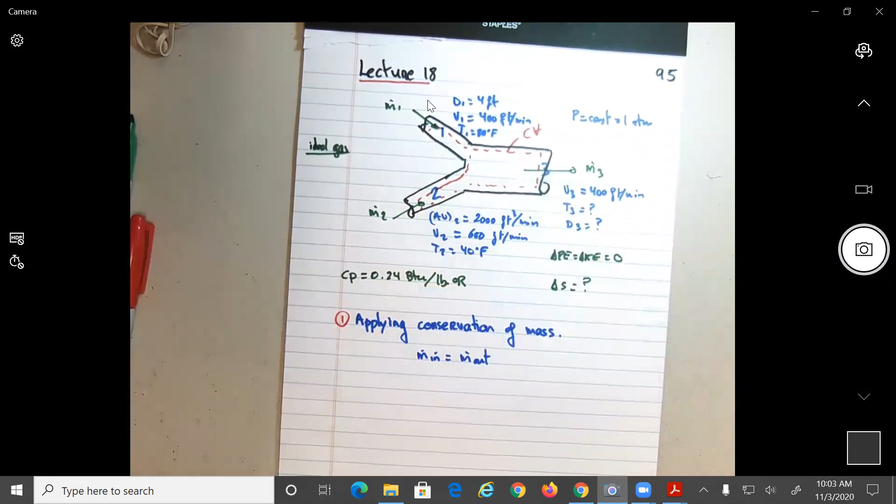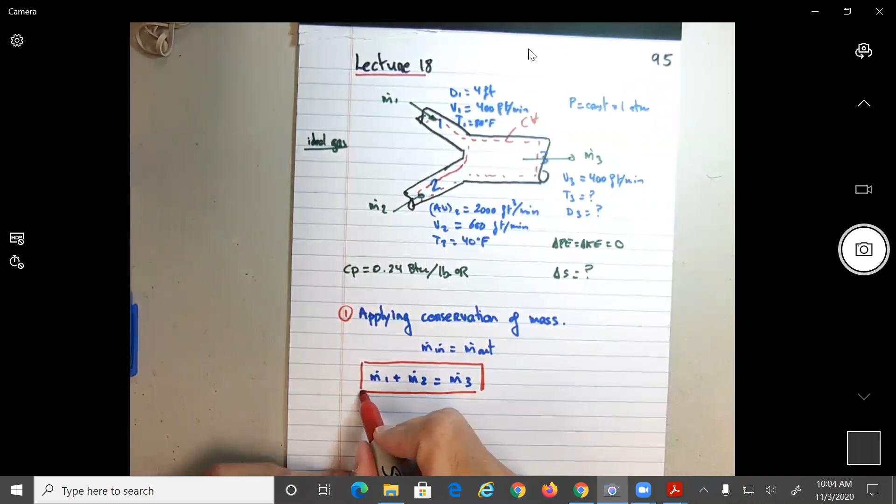Okay, so that equation will give us what? The mass flow M1 plus the mass flow M2 will be equal to the mass flow M3. I present the problem the way I will solve it on my own, because now we can start solving already for M2, because we know the volumetric flow rate. But what I like to do generally is to put at the beginning the equations that we need to solve the problem, and then go back and try to find the values. So this could be the first equation that we're going to need, like Roman 1.

And then what is the other equation we could apply to the control volume? We could apply the first principle of thermodynamics. What would that be? Q dot minus power plus, I'm going to put the general form, M H in will be equal to whatever is coming out, because we neglected the kinetic and potential energy. Okay? So let me go to the next page.

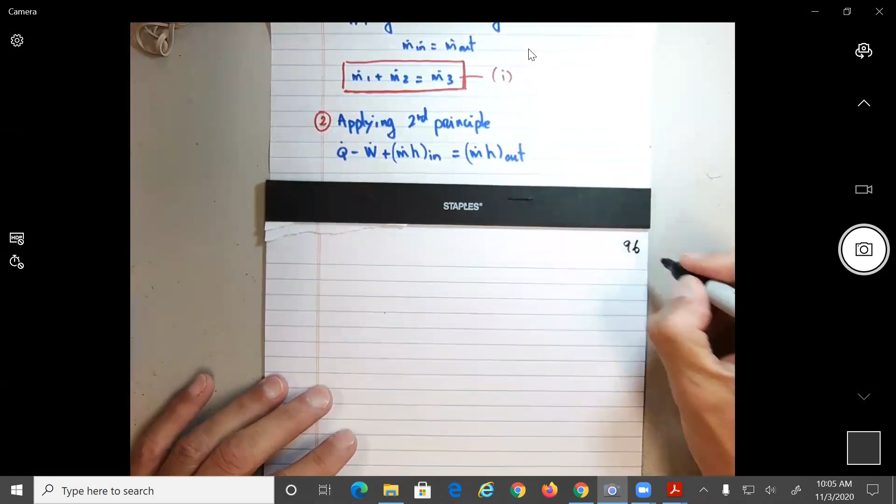So first thing, they say they had insulation. If it's insulated, that means there is no loss of heat, so the Q dot should be 0. Now, from the figure, remember the equations come from the figure. Is there any work done on or by the system over here? So this one should also be 0. How do you know that? Is there any work done on the system? No. By the system? No. This is not a turbine, a compressor, or anything. It's just a pipe, no?

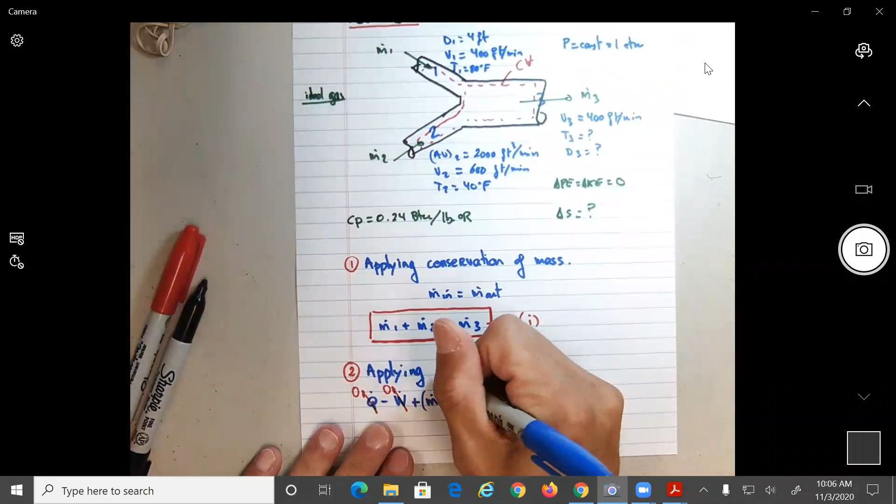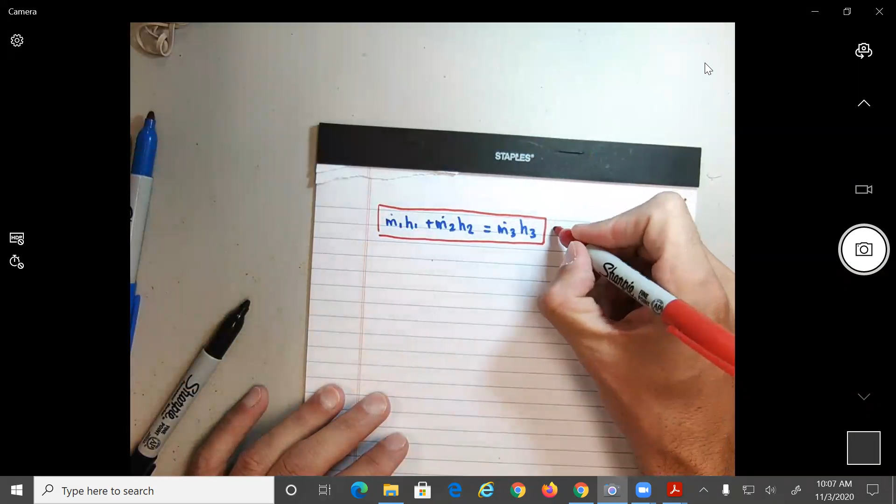Okay, guys, you're right here. I put here second, but this is really the first principle of thermodynamics equation. So the Q, the heat exchange, and the power is 0. And looking from the figure, we're going to have M dot 1 H1 plus M dot 2 H2 needs to be equal to M dot 3 H3. And this should be our second equation. So basically those are the two equations that we have.

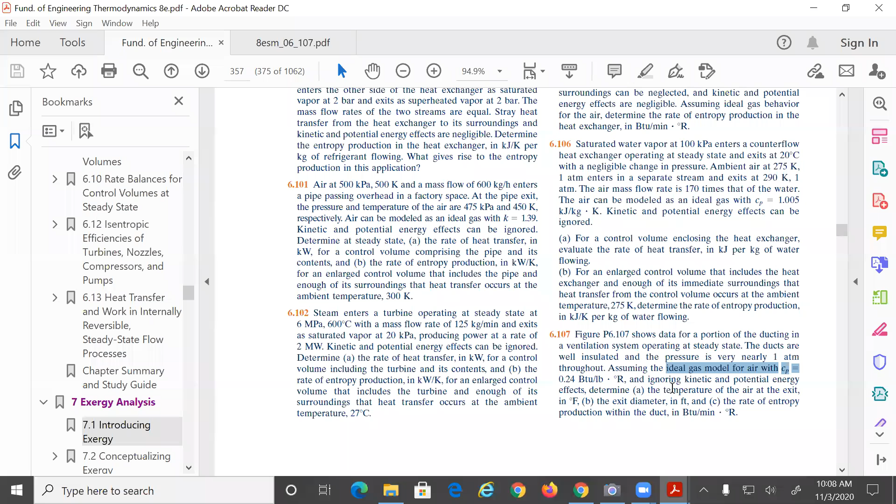But wait, hold on 1 second, maybe I did something wrong here, because I thought I read kinetic energy, but why do they give us the velocity then? Let me read the problem again. Did they say kinetic and potential, or just potential? Ignoring kinetic and potential energy. So why do they give us the velocities then? Oh, it's the same everywhere, except for here. I don't know why they give us the velocity here. All right, let's move ahead and see what happens.

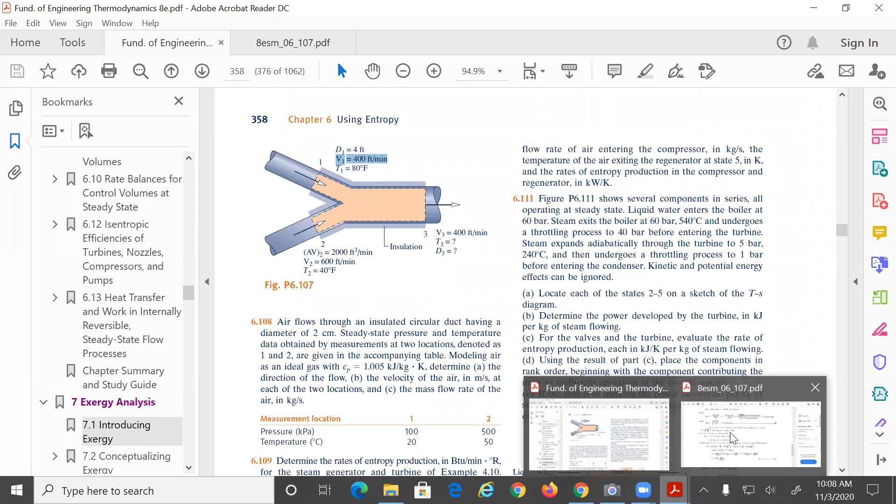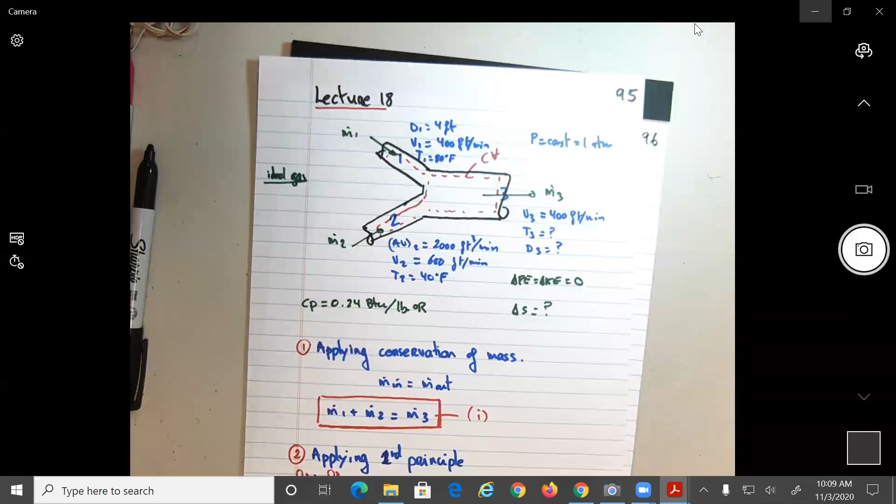Let me see what is on here, because that makes no sense. Why did they give you the velocities? Okay, so that's the same equation that we have. We need to find H3, I guess. I use the ideal gas relation. All right, let's keep working. We'll find a solution, okay? So we have this.

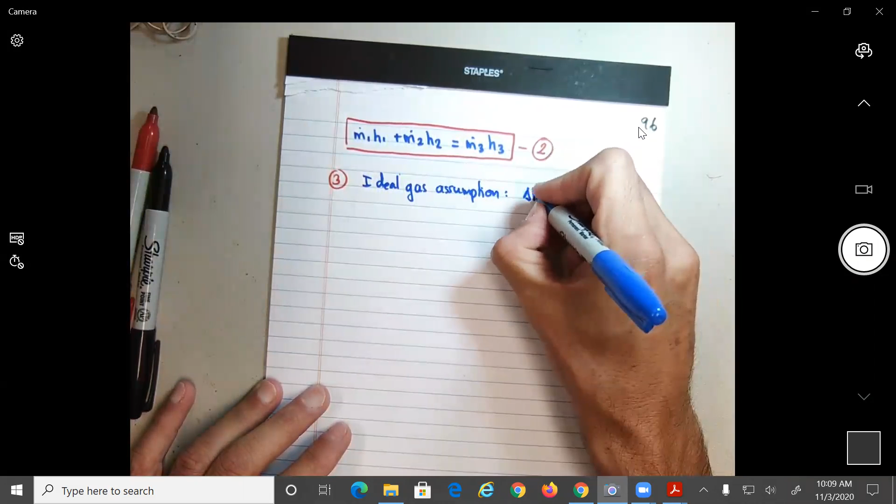And now the third equation we can have would be the ideal gas assumption: that the change of the enthalpy is equal to Cp delta T. And let's say that would be equation 3.

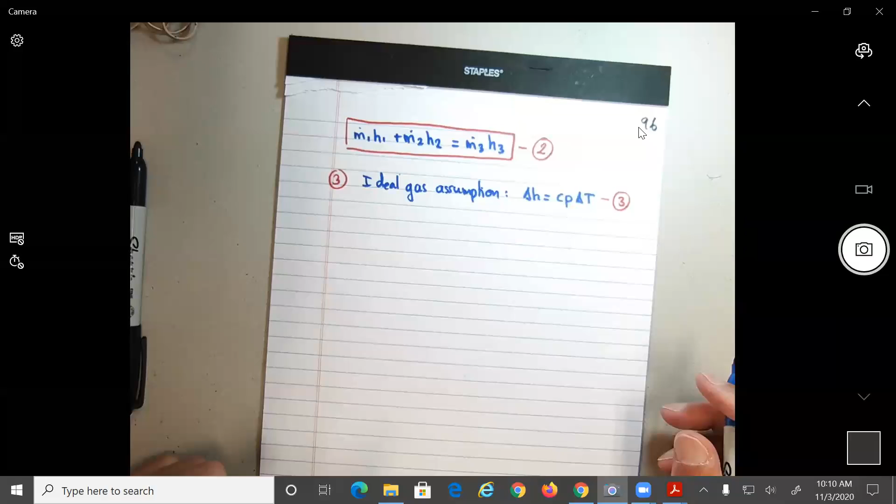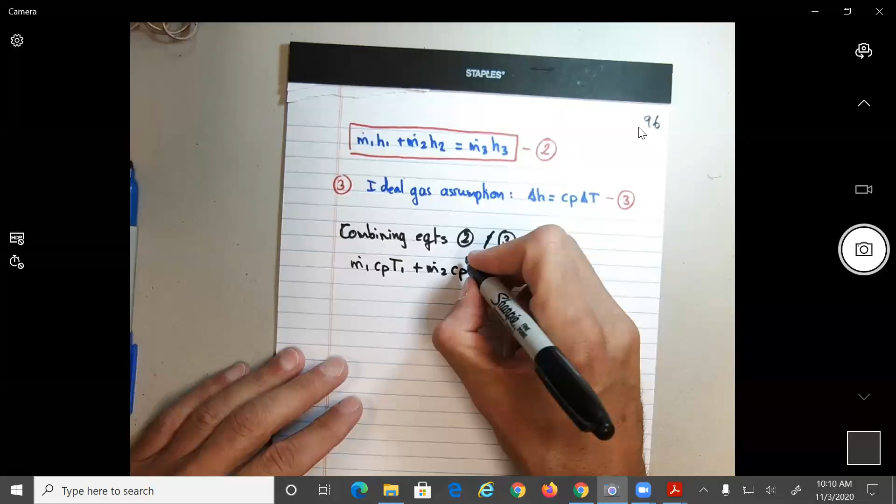All right, so let me do something here. So let's say combining equations 2 and 3, let's see what that will give us. This will give us m dot 1 CP T1 plus m dot 2 CP T2 equal to m dot 3 CP T3.

Okay, so let's see what happened here. In this case we could cancel all these CPs. And from here we could say that T3 will be equal to m dot 1 T1 plus m dot 2 T2 divided by m dot 3.

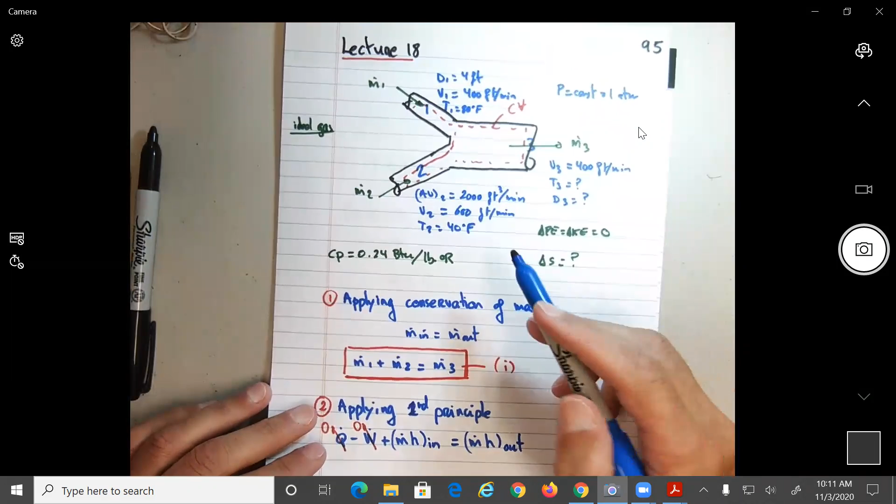Okay, so let's see what we have as information here, and let's start getting data. At point 2 we know the volumetric flow rate, we know the pressure, we know the temperature. So at point 2, let's try to find the mass flow. What's the definition of the mass flow? It is volumetric flow rate divided by specific volume.

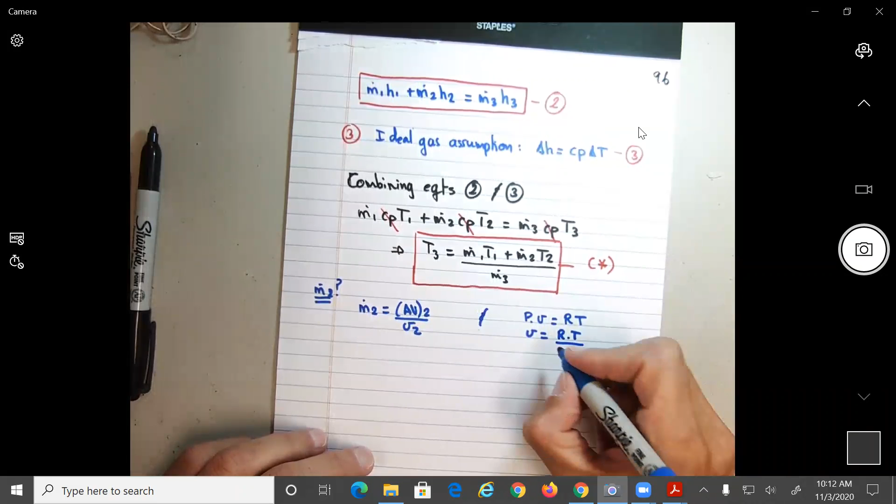Okay, so they give us the temperature. So what is the ideal gas relation? It would be PV equal RT. So from here v will be equal to RT divided by P. I need to find out if this is R bar or just R. Let me see how they did this in here. I don't know why they did it that way.

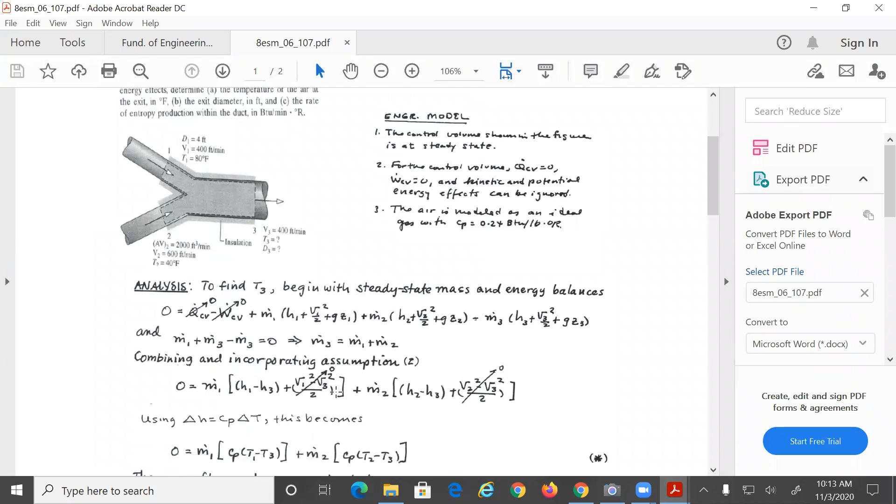Okay, PV equal RT. So it looks like it's just the R, not the R bar. Okay. We need to divide by the other one. Basically, this is the one we are doing here, the m2 over here. If we combine these two equations, this one and this one, we're going to get that m2 will be equal to AV2 times P2 divided by R times T2.

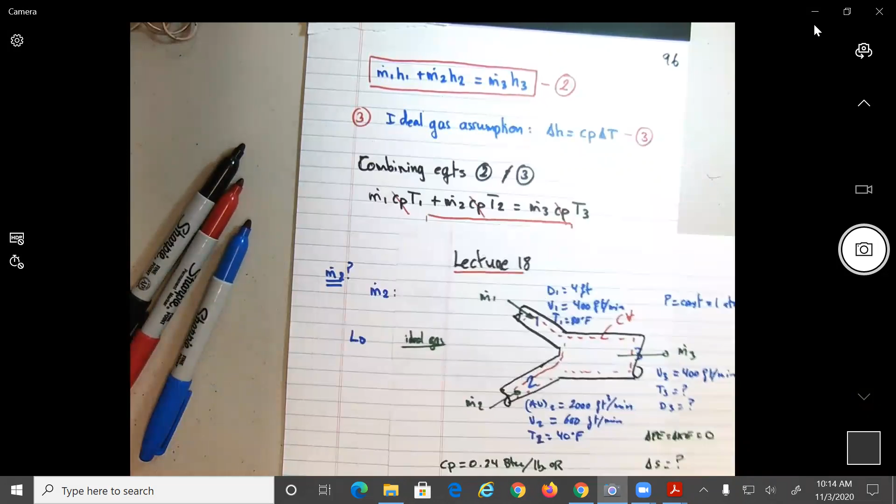So over here, what do we know? We know that AV2 is equal to 2,000 cubic feet per minute. R, I don't have the table with the units, but I can look at the solution. You need to look at the value of the universal gas constant, which in English units is 1545. So R bar is 1545. And you need to divide that by the molar mass of the air, which is 28.97.

Okay, and the P2 over here, 1 atmosphere is basically 14.7, but what would be the units of 14.7 for the atmosphere? Do you have your table over there? Looks like this will be in feet, no? And they want to transform it into inches by the 144. Maybe they have it on top. It says pound force per square inch, right above.

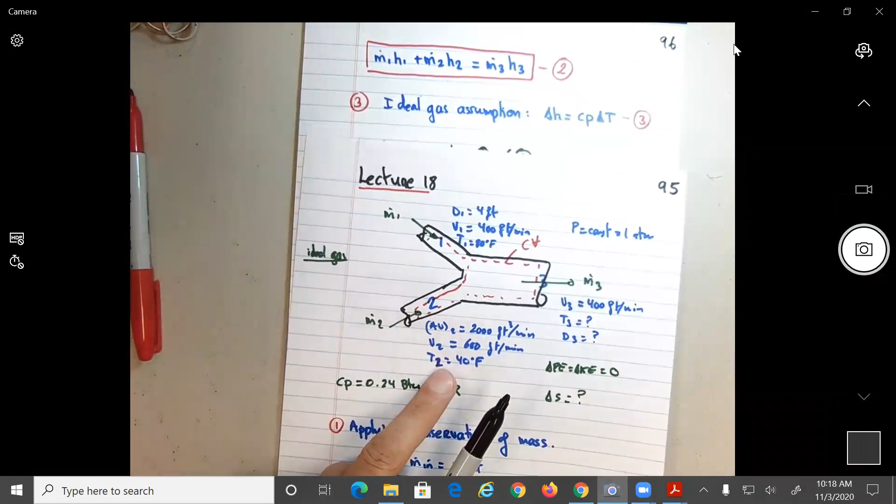So T2 equals 40 Fahrenheit, I didn't put it here, which is approximately 500 Rankine, because you add 460. So now we multiply this by 500. Please do the calculation, and that way we can check. The units we have left should be pounds per minute. If we didn't do anything wrong, we'll get 158.8 pounds per minute.

Okay, good. So that's what we get, the same thing. All right, so now we're going to do kind of the similar for M1. So this is what I've got over here. And now let's go find M1.

So for M1, let's see what can we do. Let's find the mass flow at 1. So we know that the mass flow ṁ1 will be equal to the volumetric flow rate V̇1 divided by the specific volume at 1. But in this case, they just want to make it difficult for us. They don't give us the volumetric flow rate, but basically they give us the diameter and the velocity.

Okay? So V̇1 should be equal to what? A1 times the velocity V1. Let's not confuse these two V's. This is the velocity, this is the specific volume, the lowercase v. Where here, A1 will be equal to pi over 4 d1 squared, times V1.

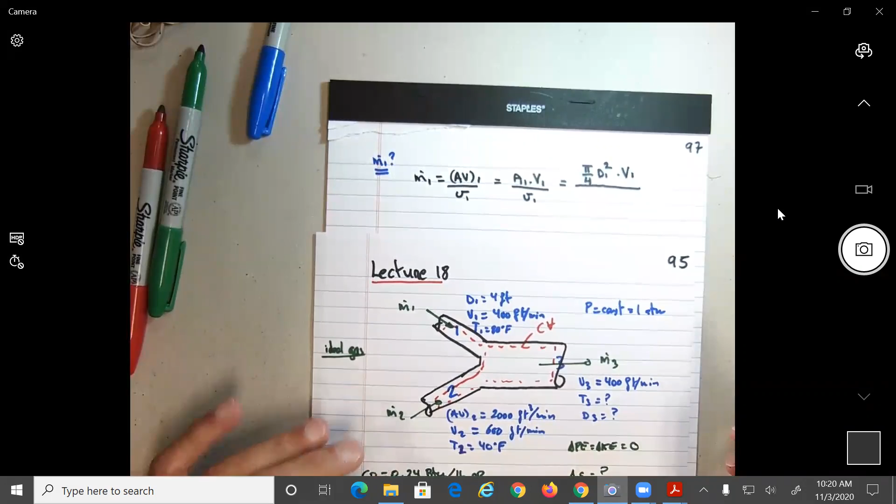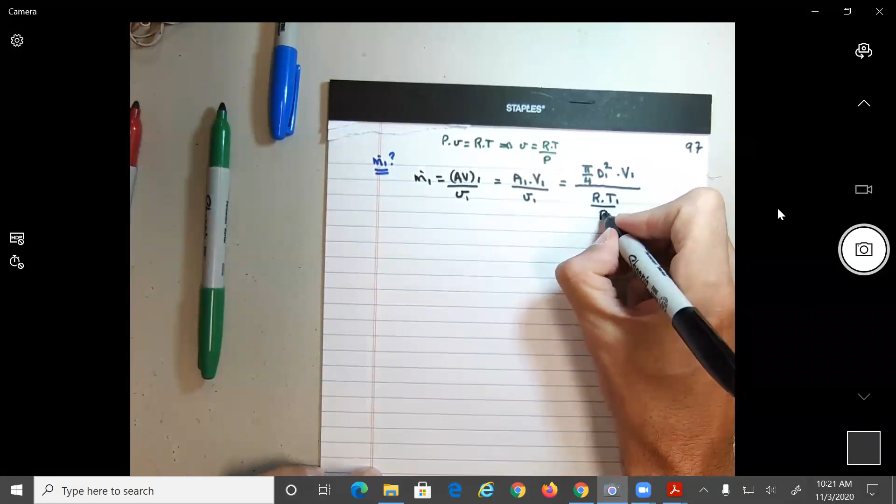And now, using the ideal gas relation, which is what? Pv equal RT as before. This will give us v equal to RT divided by P. So this is going to give us here R T1 divided by P1. Or at the end, the mass flow rate 1 will be equal to pi d1 squared times V1 times P1 divided by 4 R T1.

Okay, so in this equation, what do we know? D1 is equal to 4 feet. Velocity V1 is 400 feet per minute. P1 we know is 14.7 lbf per square inch. We had it before. R will be the same as before, 1545 divided by 28.97. And T1 will be 460 plus 80. So this will give us 540 Rankine.

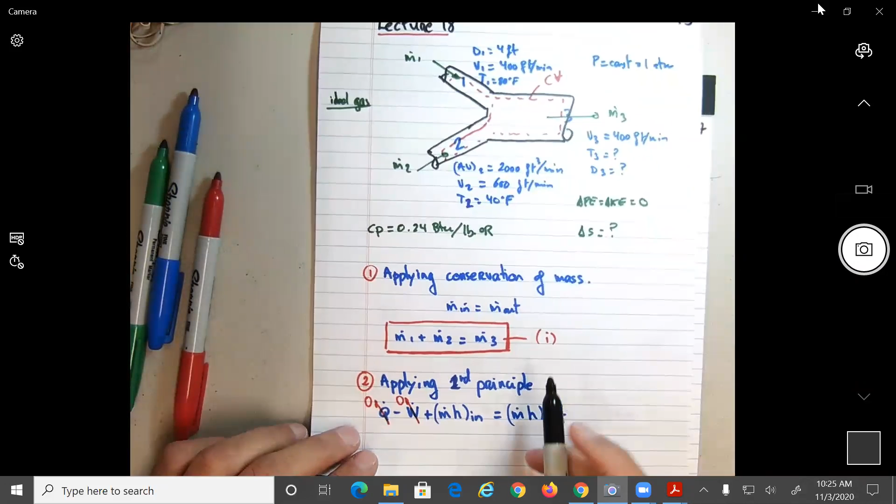Okay, and basically now what can we say from equation 1, this one here? From equation I here, we know right away that M3, the mass flow at 3, will be equal to the mass flow at 1 plus the mass flow at 2. Can somebody please do that calculation for me? So 369.5 plus 158.8. 528.2. Thank you. All right.

Okay, so now let's see if we got everything that we need in order to calculate T3 from this equation here. So recalling equation star, which is what? T3 equal to m dot 1 T1 plus m dot 2 T2 divided by m dot 3.

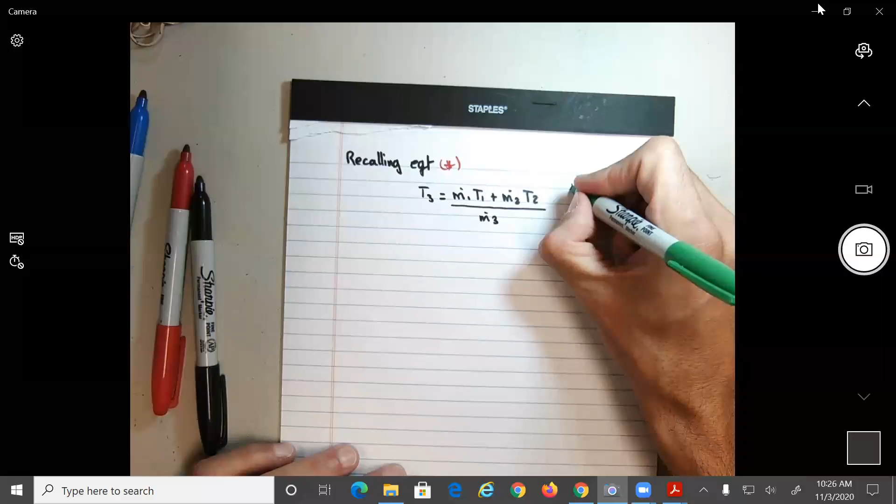So again, we know over here m dot 1 is 369.5, m dot 2 we found to be equal to 158.8, and m dot 3 you just told me is 528.2. T1 is the 540 Rankine, and T2 is the 500 Rankine. Okay, so we got everything to substitute into that equation.

So here, numerical application. T3 will be equal to 369.5 times 540 plus 158.8 times 500 divided by 528.2. So please go again and check this calculation, but to go a bit faster, I'm going to double check here with the solution, but hopefully we get the same thing. I mean, it's the same equation, so no reason why we don't get it.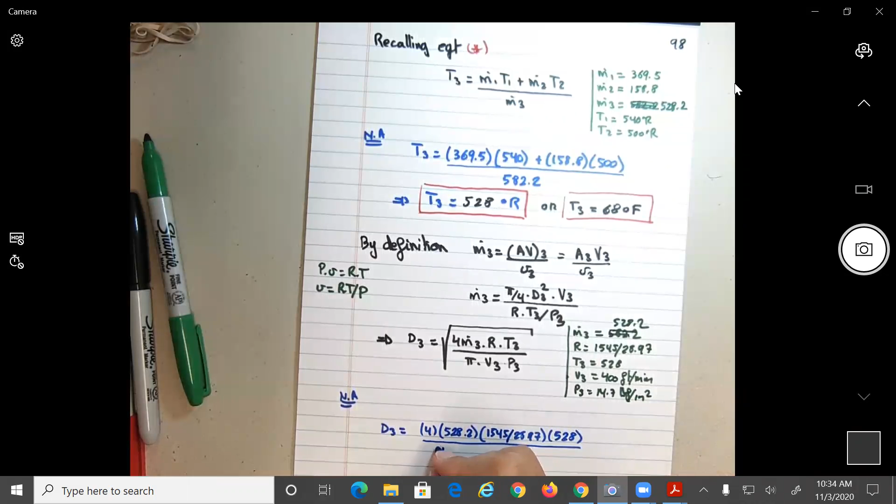pounds per inch square. So we do the numerical application, we're going to get D3 to be equal to 4 times 528.2 times 1545 divided by 28.97. T3 is 528. Divided by pi. V3 is 400. And now we need to be careful with this one because this will be 14.7, but again, we need to move it into feet, no? And we need to take this whole square root over here. And hopefully this will give you the result in feet.

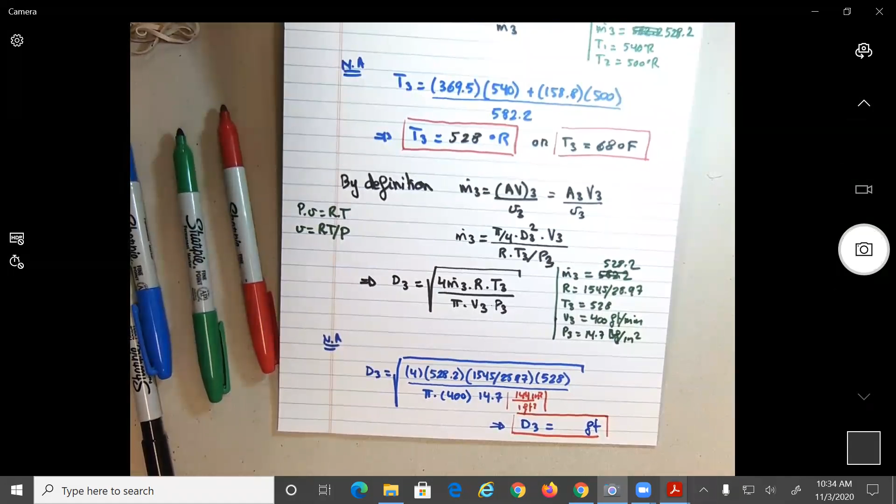So please do the calculation to check. I don't like to copy from the solutions. I just do it in order to go a little bit faster so we don't waste time doing the calculation, but please check it. If we didn't do anything wrong, this should be about 4.73. Is that what you get? Yes. Okay, 4.73. Okay, here I use a different notation than the book, so we have to be careful here. All right. Okay, so we did this. So far, this is a problem you could have done with the knowledge that you already have. So page 99.

Okay, now the next thing we need to do is to estimate the entropy change of the gas. Okay? So I don't think we saw it before, but it's one equation that I call the principle of increasing entropy

of the universe. I know it sounds very complicated, but we say that the total change in entropy is equal to the change of entropy due to heat transfer at this temperature, so this will be heat rate because we have the dot, plus m dot any change in entropy that you might have. Okay? So let me pause this for a second and let's see if we can go back to the notes. See if we can find that. Yes, okay, all right. But anyway, did I pause this?

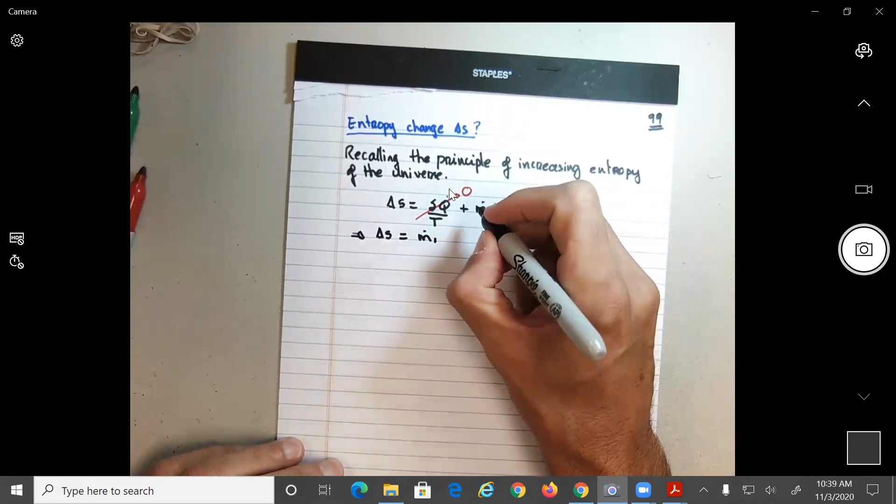Oh no, not yet. So in our problem over here, do we have any heat exchange? You need to look at the figure, but they said the system was insulated, no? So we say that Q was equal to 0, remember? So what does that mean about this term over here? This one will be 0, okay? So really at the end, what are we left with? The change in entropy should be equal to M1 S1 plus M2, okay.

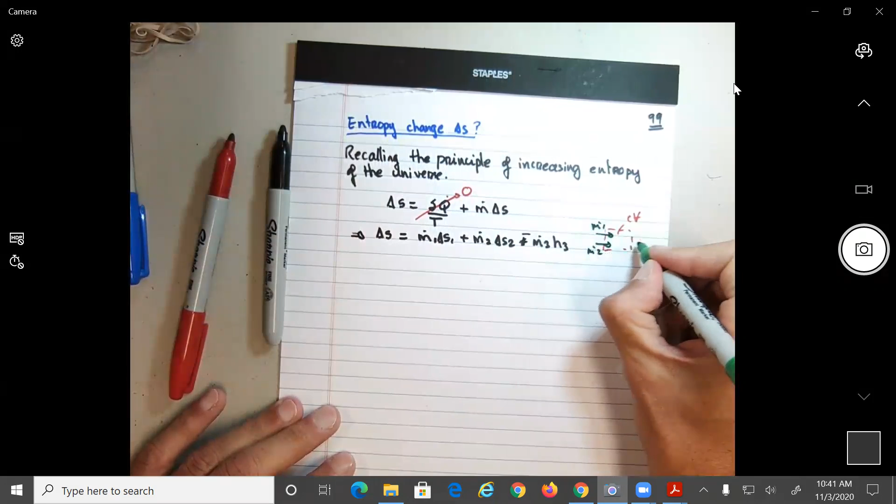Got a delta here, delta S1, delta S2, plus or minus. Let me see something here, I think it should be a minus, because that's what happened at the exit. Hold on one second here. Okay, so this one here is a minus because, you remember, on your system here, this is your control volume. We have M1 coming in, M2 coming in, M3 coming out, no? So it should be positive, this should be negative.

Okay, so here there's a little trick to do. I think to solve it more properly, we know this is going to be equal to M dot 1 S1 plus M dot 2 S2. And what is M3? M3 is M dot 1 plus M. Guys, I'll say something else. This is S3, not H3, S3. Minus M dot 1 plus M dot 2 S3. I mean, it's clear that M dot 3 is equal to M dot 1 plus M dot 2, no? From the previous answer.

So now we can rearrange this as being equal to M dot 1 times S1 minus S3, plus M dot 2 times S2 minus S3, and this will be the change in entropy.

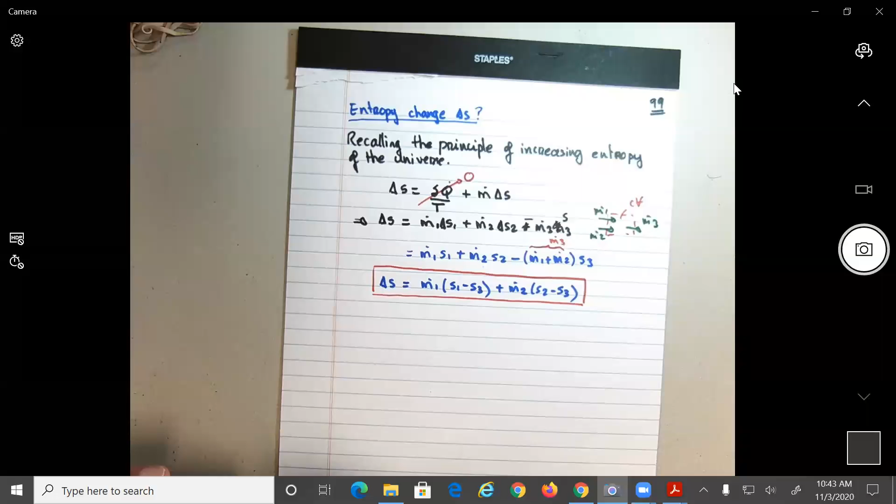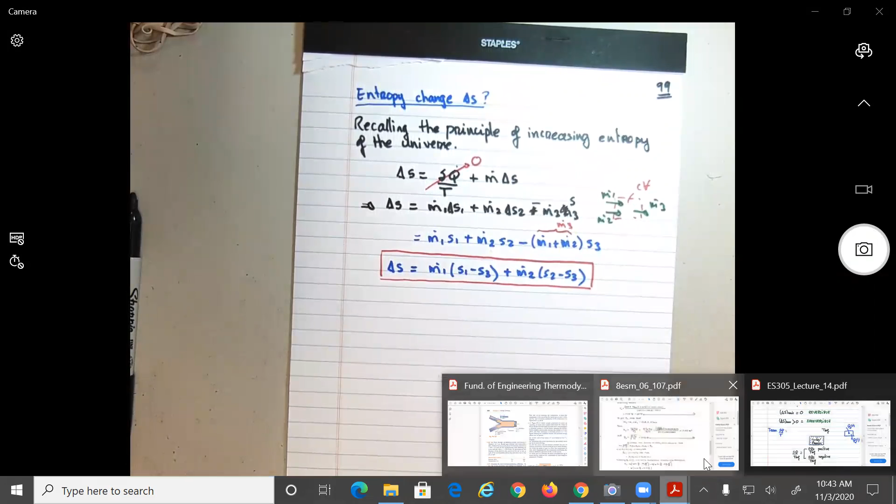Okay, let's do it as if we didn't know the equation. It will be a little bit longer, but I think it might be a good thing for you to refresh the theory. So now we need to find a relation for S1, S2. Basically, instead of going to the TDS relation, I think it was in chapter 6, and just copying this equation here, I don't think engineering should be cooking, okay?

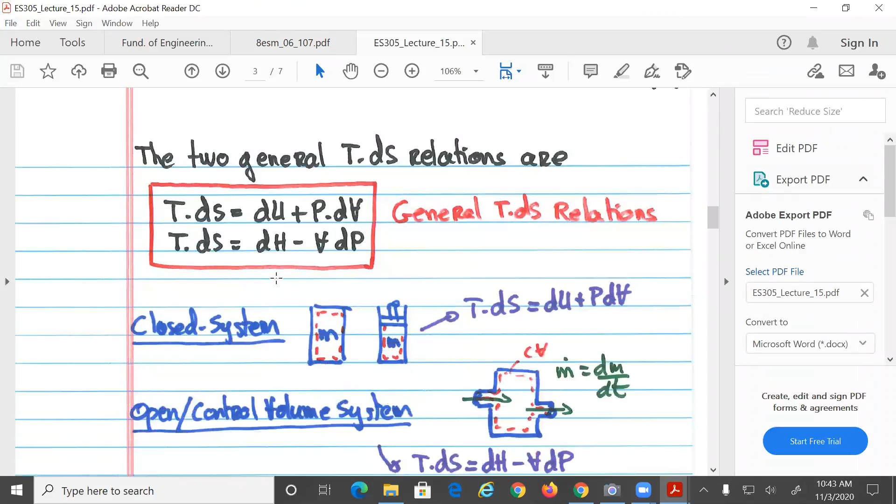So we'll use this. I'm going to write it differently here. I'm going to go through all these pages again and redo it very quickly. I'm going to get to this equation first. Then we're going to do the assumption of the ideal gas relation, which will be this one. We're going to substitute into this equation, and we're basically going to end up with this equation over here. It's already in the notes, but let's just redo it to see how we can do it. All right, so let's go and do that.

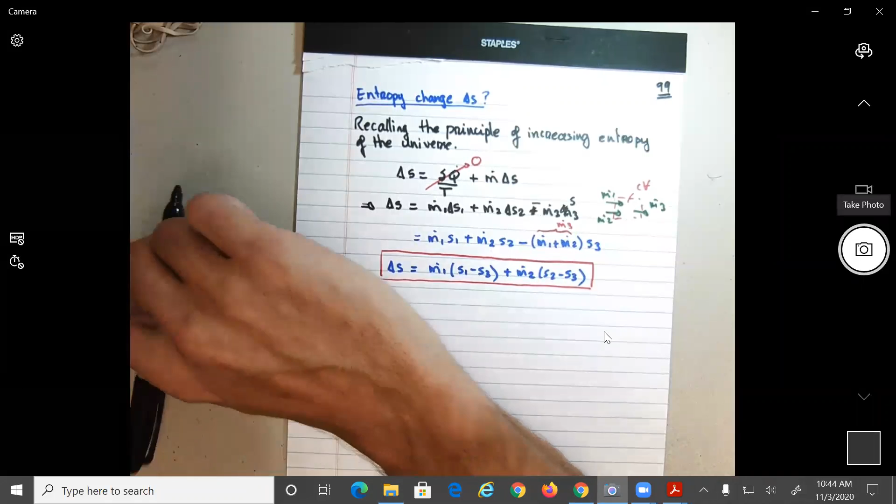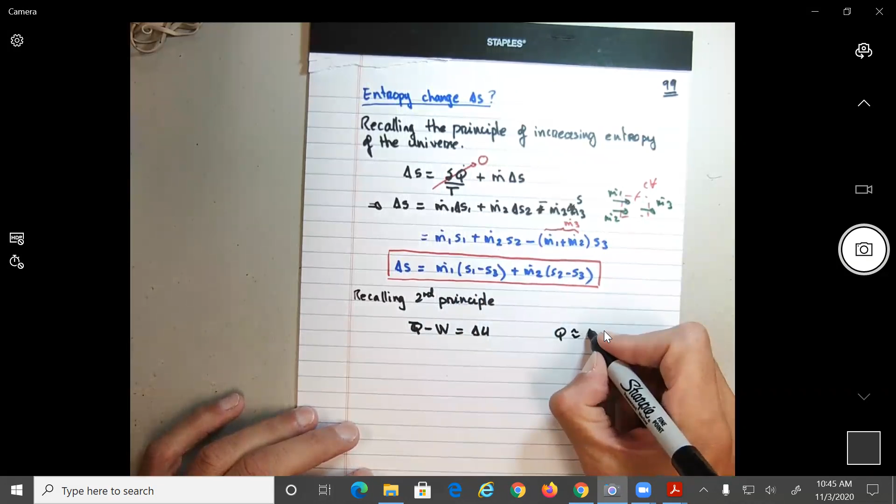So over here, recalling the second principle of thermodynamics, it will be equal to what? Let me redo it from zero: Q minus work equal to delta U, where Q is approximately equal to TDS. So we have the relation TDS, and the work is equal to PDV. TDS minus PDV equal to the change in internal energy.

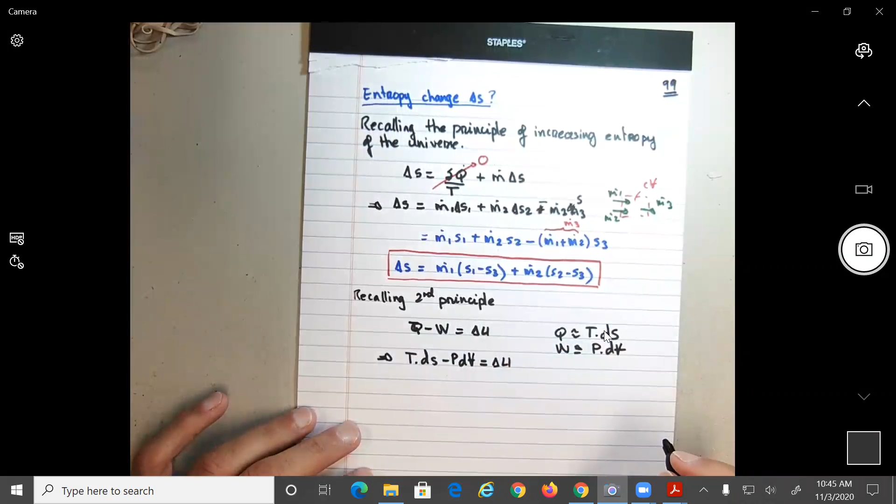I tried to go too fast here. Okay, so this will give us the first TDS relation, TDS equal to delta U plus PDV. Or we can write this as TDS equal to DU plus PDV. Okay?

Okay, now, by definition, what is H? Remember, H is enthalpy, no? So what will be dH? dH will be du plus PDV plus VDP. You understand what I'm doing here? The derivative of UV is U prime V plus UV prime, no? So from here, we can find that du will be equal to dH minus PDV minus VDP.

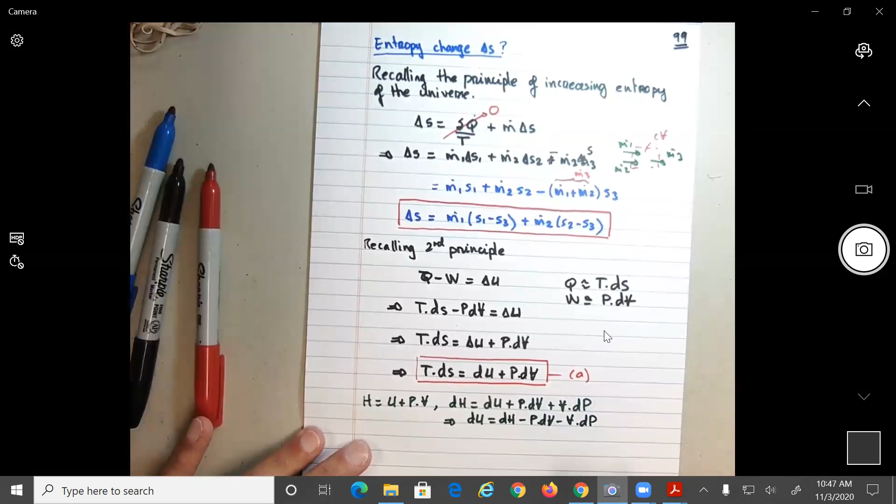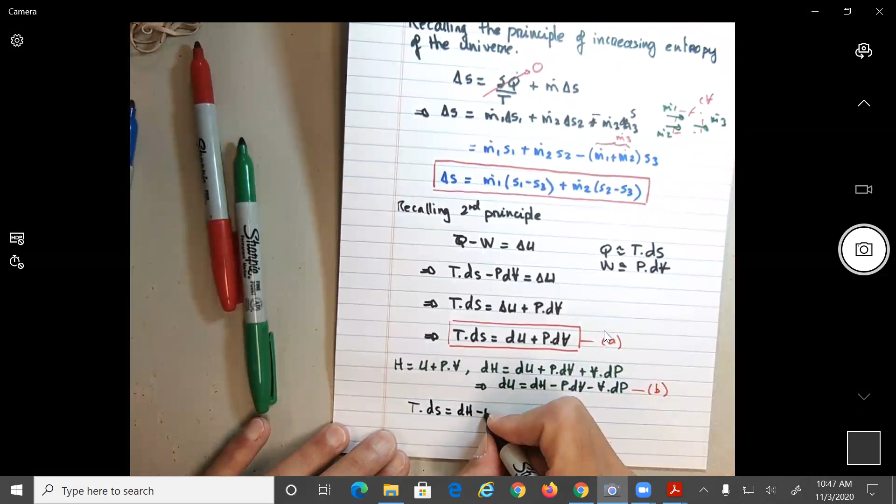I'm going to go a bit faster again. So if I substitute this one into here, what's going to happen? You're going to have TDS equal to DH minus PDV minus VDP plus PDV. So here you see that this one cancels this one. Now we have TDS equal to DH minus VDP.

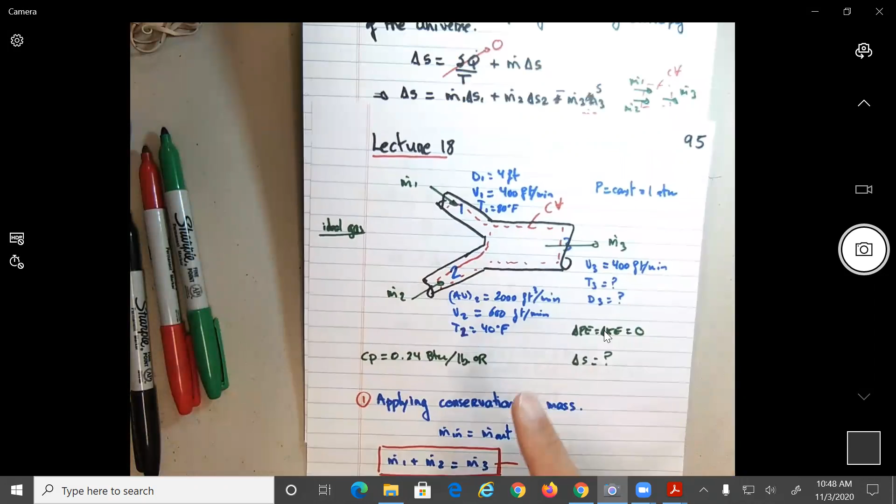I'm going to make it specific to our problem. So in our problem, what do we know about the pressure? It's constant everywhere, no? So you could go and substitute into the last equation, but over here you could say dP is 0, no? So at the end, from this equation, let me put it on the next page, you could say that TDS will be equal to the change in enthalpy.

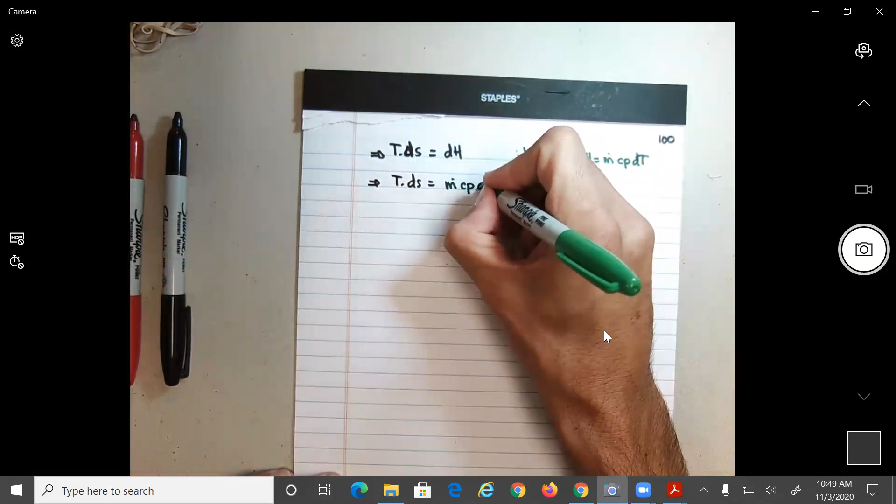And by definition, for an ideal gas, the change in enthalpy is m Cp dT. Yeah, du will be m Cv dT, no? For an ideal gas, Cp for this one. So this will give us TDS equal to m dot Cp dT, or dS equal to m dot Cp dT over T.

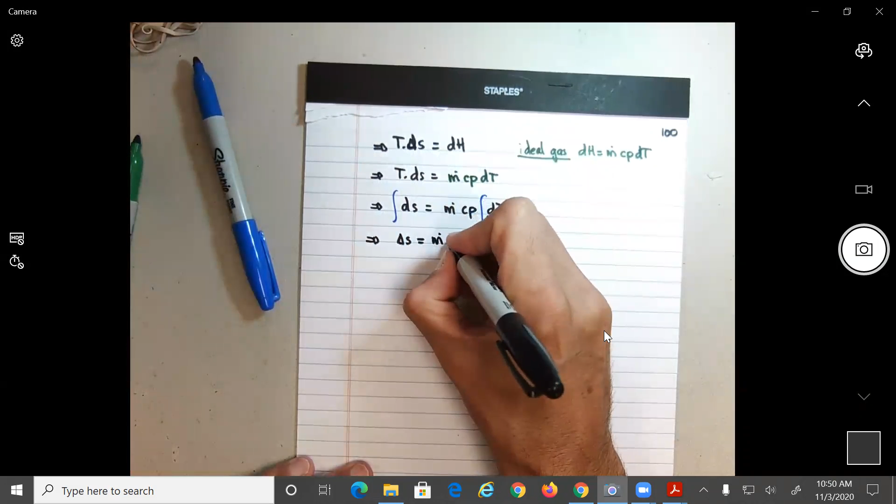You integrate, and this will give you what? That the change in entropy is equal to m dot Cp log of T final divided by T initial.

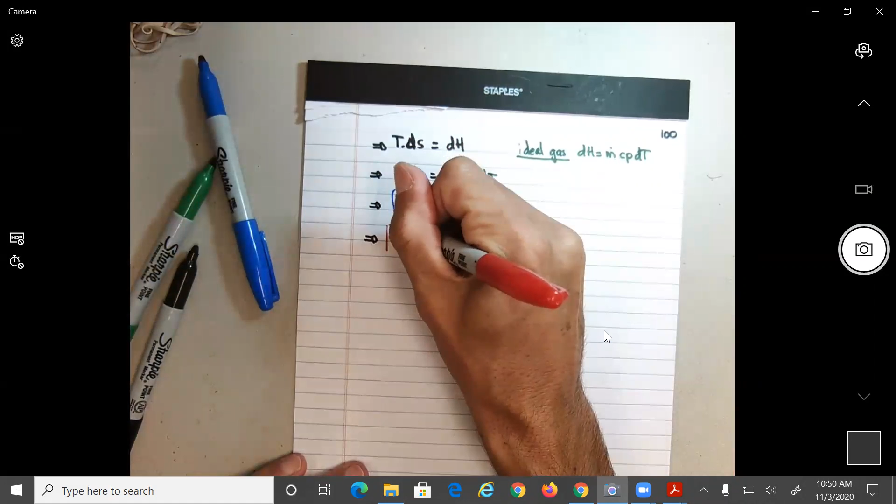So basically what I have done so far is what? It's like if you want this equation here, derive delta S. Here, if P2 equals P1, what is the log of 1? It's 0, no? So basically we only have this term left. Okay, but it's the same thing. Alright? So we have this.

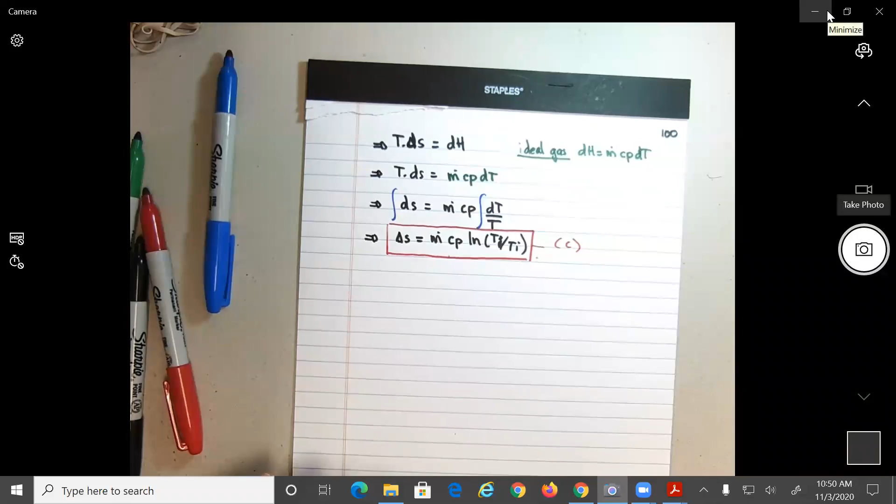And now let me just say here, I'm recalling this equation here, all right? Recalling this equation here, which is delta S equal to M dot 1 (S1 minus S3) plus M dot 2 (S2 minus S3). This is equal to M dot 1 delta S 3,1, because it's final, or 1,3, whatever you want to call it, plus M dot 2 delta S 2,3.

Or we can write this as well. The total change in entropy should be equal to what? M dot 1. I can substitute this delta S by Cp log of, so again this will be T1 over T3. Oh, what did we do here? S1, S3. So T3 over T1? Yeah, the final state will be T3, it should not matter here. For me it should be T1 over T3, let's do it this way. Might be a problem with the sign at the end, but we'll figure it out.

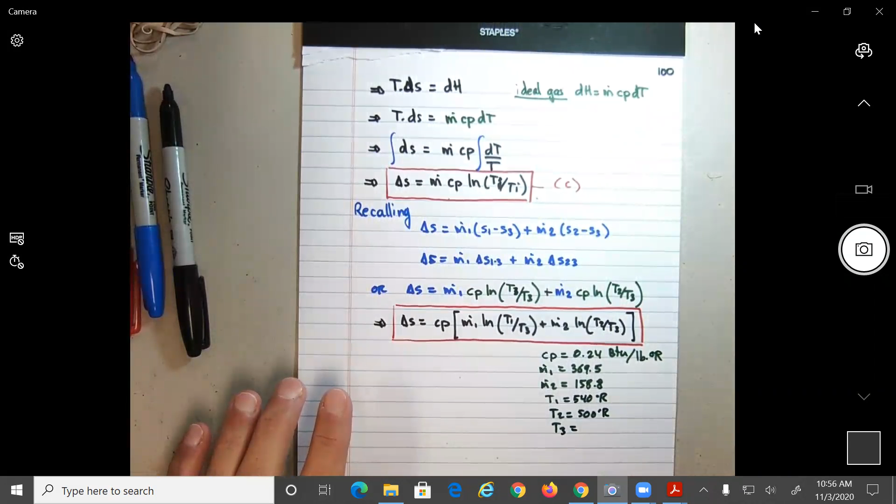So pounds per minute, and Cp, what are the units for this? BTU per lb Rankine. Let me check something here with the units. So we're going to get BTUs per Rankine per minute, change of entropy per minute. Okay, that's fine. Then T1, I think that was 540 Rankine. T2, I think it was 500, if I remember right. And T3 is the one we calculated to be equal to 528.

So guys, please do the calculation slowly with me because I want to check something. Can you first please do this calculation? 0.24 times M1, which is 369.5, times log of 540 over 528. So if you do the first term, what do you get? I got 1.99. Positive value? Yes. And for the second one? It's negative. But is it bigger or lower than 1.99? It's bigger. So that's a problem, because we can only have a positive value, no?

Okay, we only have 2 minutes, but let me try to figure this out quickly. So guys, I made a mistake on the notation: the final should be T3, because it's the exit. So really all these are reversed: this is T3 over T1, and this will be T3 over T2, switched, one up, one down. Now I'm just going to copy the solution. We should get a positive value, but please double check it. That should be equal to 0.084. But the value is not really that important.

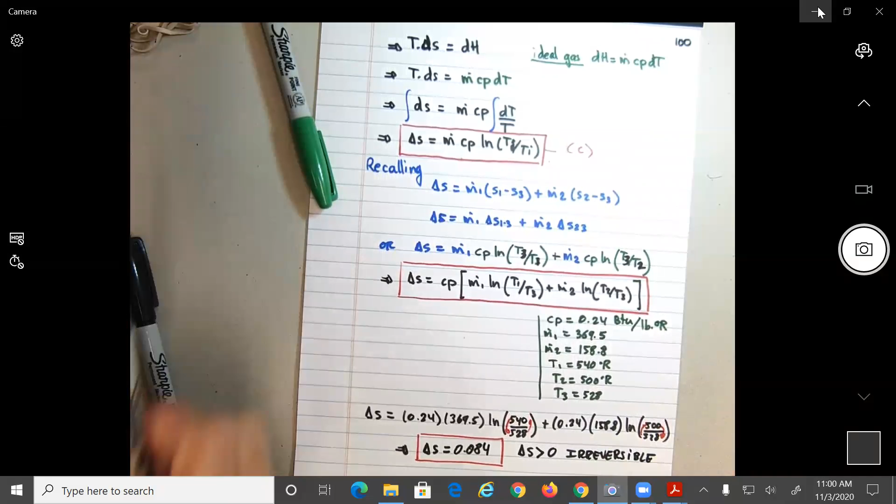What is important is what? To realize that it's positive, different than 0, which means that this will be irreversible.

Okay? So I'll stop the video over here and we're going to keep doing this type of problems, probably on Thursday, practicing, and then we're going to go to some cycles that will be a little bit more specific. Okay?